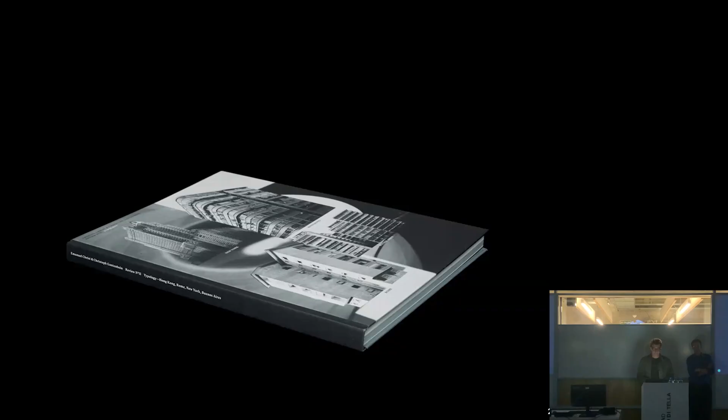So it's actually a collection of building types. We called it very boldly - and that's a wonderful thing with teaching - it is pretty simple, it is a toolbox. Maybe I should say the typology project is not just a research project, it's also a teaching project. Because what we are proposing in this first volume is that it's not just about documenting, it's about using these types. Therefore, we speak of typology transfer.

A type can be transferred and transformed. In this understanding, in very short, typology - maybe even different from Aldo Rossi - is not so much about the frozen truths of architecture that is permanently true forever, but typology is a dynamic, creative mechanism of constant transfer and transformation. I think that's very, very important. That's also why we believe it is worth studying and documenting the building types of a city.

So it is a catalog, as I said. That's a spread of the book. In this case, New York - drawings, photographs. We never up to now did build physical models. There is axonometrics, but the models are a different dimension, obviously, as we could see. Oh, but what's that? That's the wrong one. That's the right one. Voila.

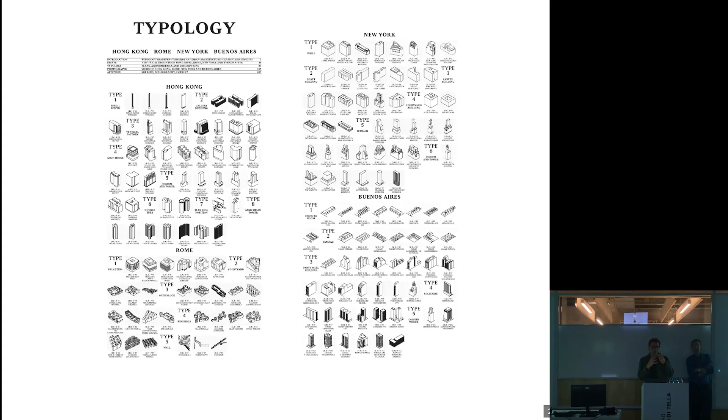It's an index. There could be a whole story about how to classify and create families, which is maybe less important right now. And because you know it, we mentioned it - I think we can show you there is a basic understanding of the wonderful city of Buenos Aires, even though we are not here to teach you about that. But there is the beginning of a project that can endlessly be continued.

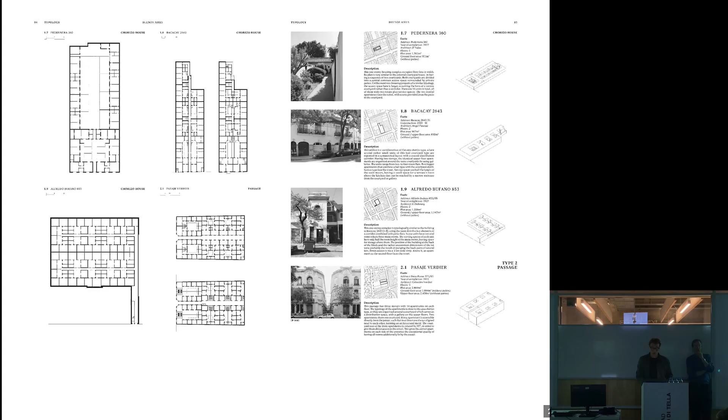The Casa Chorizo is the first family that is represented here. In different variations, it goes on, it gets more complex. The pasaje - or I don't know how to pronounce it correctly - is then the next type. When the street is entering the block, the system gets more complex.

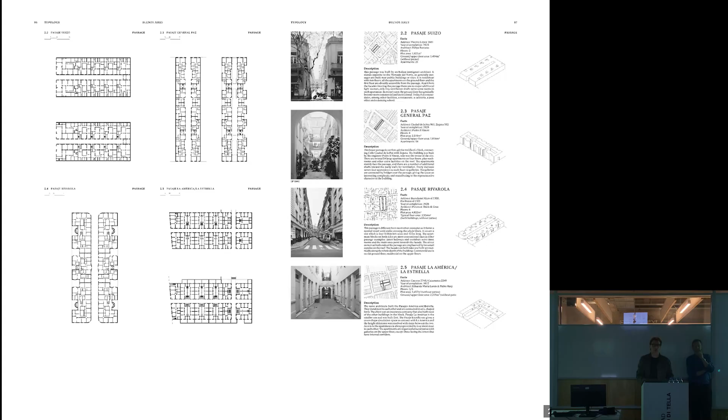You see the density. Without understanding and without having the time to go into detail, we see the complexity and the richness of the plan. But then also we understand with increasing pressure, the city is getting vertical, but the lots are the same. So I'm not speaking about authorship yet, I'm just speaking about the stupid rules of the city, the constraints, and what is interesting is it is producing perhaps the most exciting architecture, even without big city planning.

Of course, the intelligence of the architects comes into play, and there is even one very famous example by Clorindo Testa. We found that at the time, and we were charmed by it, but we are also even more impressed maybe by more generic buildings.

It's also beautiful to see that the city - the ordinary and the monument - the cultural center, the theater, is it a monument? In a way, yes, but in this case it's squeezed into the logic of the grid, of the manzana, which we've also learned yesterday with the wonderful drawings in the exhibition, how important it is. So you see there are layers of knowledge, and we come back to Buenos Aires and we learn more. We see original drawings, so the research and investigation is never finished.

And that's the last page. It's longer, but there's the last page. Also, I guess, one of the last buildings by Alvarez, the American Express Bank, to the bottom right, which we loved at the time so much and we still do today. That was the first project.

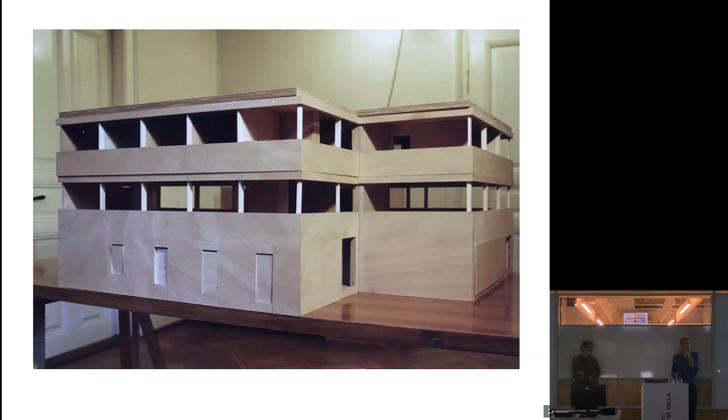So we started with the question, what is the system of reference for this project? And we did exactly what we did this week with the students here. We did a field trip to do a kind of portrait of architecture along the railway, to find out what is the architectonical theme, the subject, when building along the railway.

Already a bit over, 1970s, but they have the beauty of this very modest but very applied modernism. It's not a kind of designed architecture which is designed to represent. It's this kind of architecture which you would hardly even perceive.

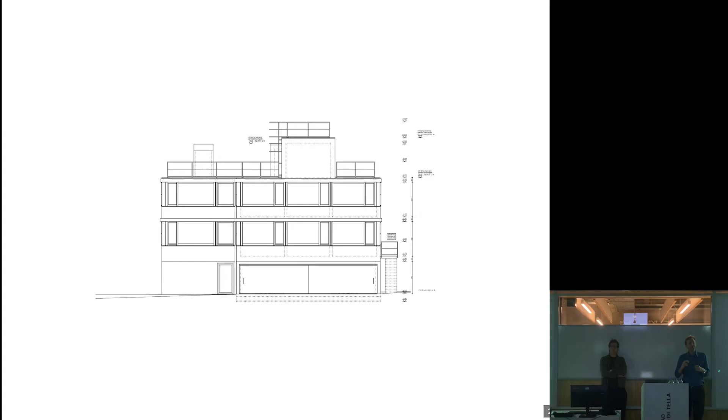This is another facade. So also this railing on the roof, the garage window, the garage opening in the front. It's all directly taken from this catalog that we built up. And even in the floor plan, you can see even the typology is based on a constructional system using a very clear regular grid. It's not a typical floor plan for housing, but it's prefabricated concrete columns. And then somehow the rooms, they deal with this industrial structure of the plan.

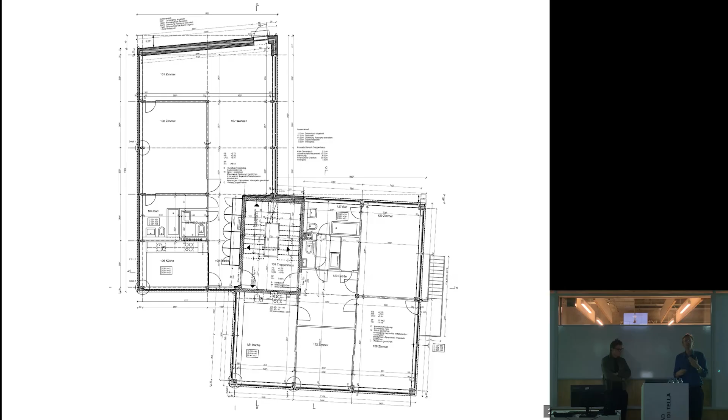And of course, it is not just a story, but the conviction is that by choosing this architecture, which is traditionally built along railways, for instance, you build up a relation to this railway, also physically, that these windows face the railway, and they accept it as a reality, and this building wants to stand at the railway, that you would also transform such a specific quality, like this position at the railway, from a potential problem into a quality, because it's somehow beautiful.

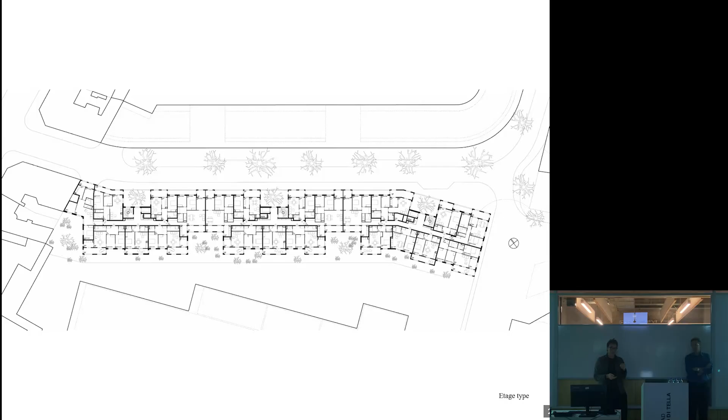So it's the logic of the meandering plan that made it possible to come to a layout which is quite generous for social housing, because the square meters, the distances—you might know this is similar in every country, there are very strict rules, it's on the square centimeters actually.

What we try to show here in this part of the plan—this is like half. You see that one apartment offers a sequence of different spaces. It's a layering, and by that, sometimes tiny rooms—a small room after a small room. But by doing that, we are offering depth, perspective, and we believe also spatial generosity, particularly because there are big openings in some parts.

This is the kitchen—we have to do it twice. We introduced the rule that the kitchen is connected with a double door to the room in front. And then there's a third element: the entrance, the room, the kitchen, and then the loggia.

The loggia doesn't count because it's a free, empty space—it's like a balcony. We learned this can often translate into a garden in the context of Buenos Aires; we saw the wonderful project in O'Higgins this morning. But here, especially because we're talking about small apartments, we transform the balcony that isn't counted in the overall calculation into a room-like unheated buffer zone, a loggia space.

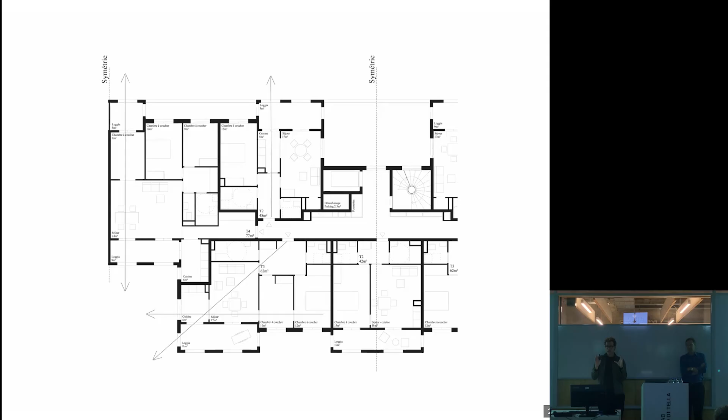You can recognize the arrows—it's about the view, the series of space, the meandering plan offering different depths. So we can even create moments with transversal orientation. This is not rocket science. It's in the end a very modest ambition: to offer rooms with a decent proportion, a window, a relationship to an adjacent room, and maybe even the perspective through the whole building. This is what we try to arrange in this very dense plan.

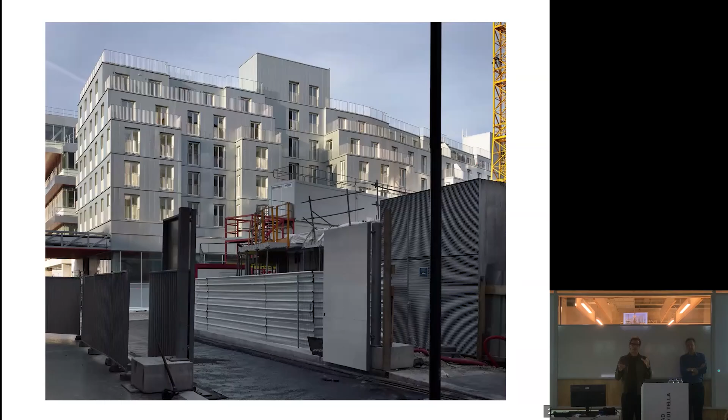It's a very light construction, the walls are 5 centimeters thick. And that's the outside, that's the freestanding end. We can read a stepping back volume, one type of window. When we get closer, you see that was the construction of the neighbor. It is a bit more complicated because there is a workshop underneath.

It's raw, or almost very little treated steel panels, one type of window. So the building speaks a language which is familiar to the place, if you will, but at the same time it is also making a difference. This is Christoph Gantenbein. It has a clear principle, it's a typological order, it speaks to the context, but it tries to emancipate from it with a crossover strategy. It's grey, it has vertical proportions, it looks for the alignment with the neighbor, but it's breaking its physical attitude by using metal, that is speaking maybe of the presence of the industry, of the car or the train fabrications, etc.

So the term of type and typology was mentioned several times. Type meaning an abstract group of features which define a group of objects. Of course, tonight we speak about architecture, which are related to function, to use, but also to construction, how it is built. And of course, these types are kind of a solution for a typical problem. Like, for instance, here in Buenos Aires, you have these very deep plots, very narrow, very deep plots, high pressure of economical pressure.

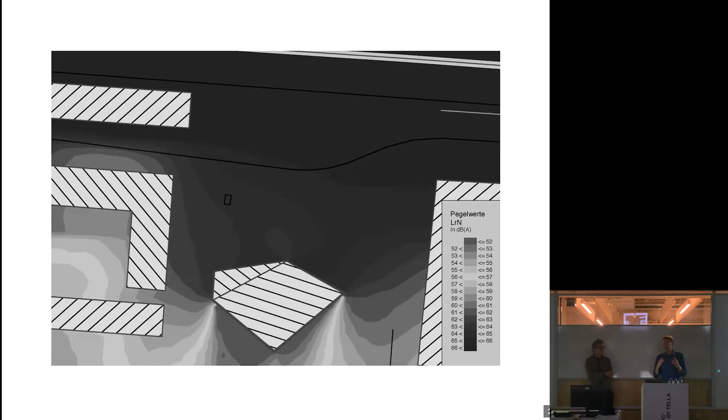It looks a bit dark here, but this is green, so this is unproblematic, whereas this is really hardcore, exposed to the noise. So this geometry of this tower is a pure technical, scientific reaction to the noise problem. So architectonical form is directly related to noise, to the physicality of noise, but also to the regulation. So building laws, and in Switzerland these kind of acoustic regulations are super tough, can have also an impact, and there were no precedents because these laws are relatively new.

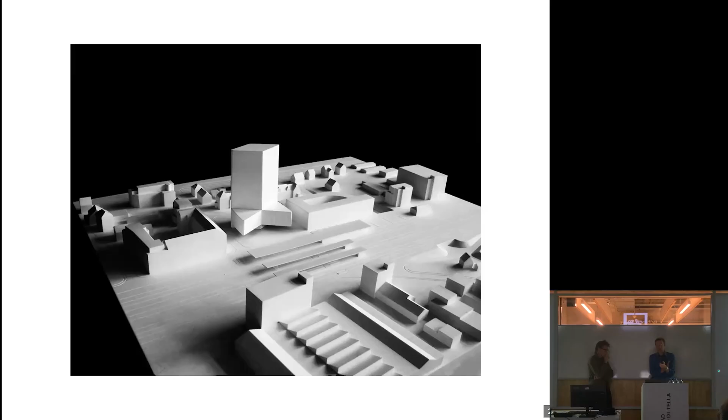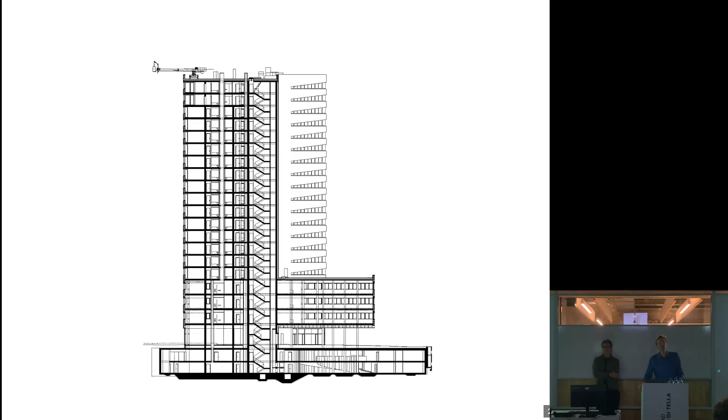So we were forced to develop this volume, which is not a type yet. You can see this section: ground floor, this socle for this podium for offices, and then this tower for the housing. The specific solution, the typological invention, is this fan floor plan with a

staircase in the corner, which you would normally not do. Normally you put the staircase in the center because you don't need any light there. High rise, you wouldn't use the staircase anyway. But you would put it where you have the noise, and let all the apartments profit from the sunny

south side and from the side which is not facing the noise. So it is a kind of precarious type, because these apartments are very deep. You can see the ones along the facade, they have at least light, but not openable windows, but in the center they are 12, 13 meters deep with light from only one side.

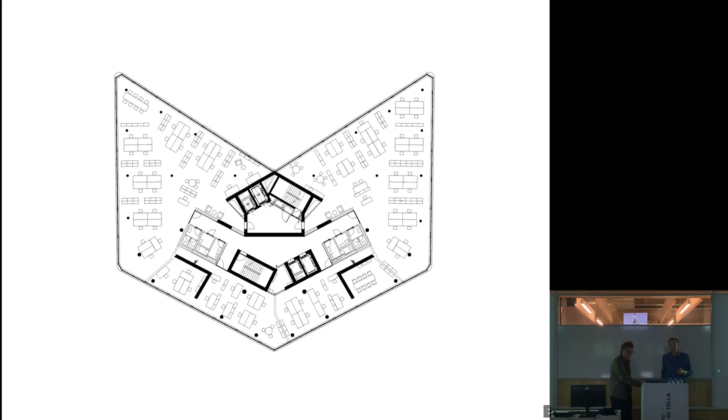This is the socle with these offices. This is much less problematic, of course. And then it's a question as an architect what you do with this very rational construction of such a type, or a development of such a type.

And we were appreciating, and also very excited, in giving and finding a form for this specific organization of the floor plan. So this staircase is completely closed, and then these windows, which are opening slightly like an eye, which is opening. Somehow they tell about this noise, which is not optically visible, but architecture is very much about optical perception.

So the form of these windows and the form of this architecture tells about this protective character of the body and of the facade, which has to do with this noise. The socle, of course, with these offices doesn't need it, so it works in a different way.

And therefore, through this form of this closed staircase, the relationship to the railway, again, as in the example before, is built up, because it is a direct transformation of physical, acoustical reality into architectonical form.

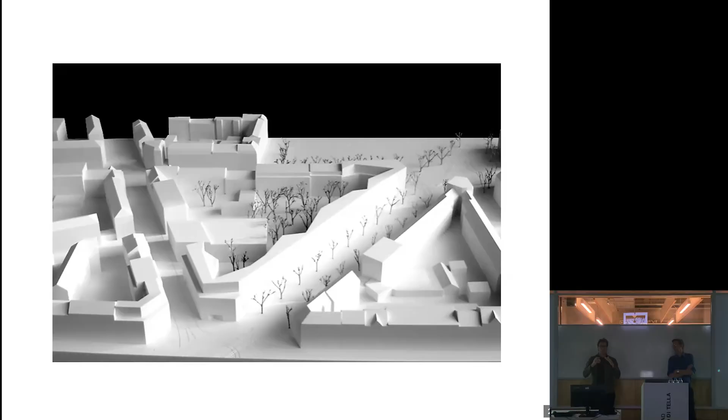So we started to widen up the angle a bit, and to move the line. It was almost like the geometrical problem in the plan was affecting the formation of our block. There's another thing: the courtyard is on the north, so all the apartments have a noisy street in the south, and a very beautiful, quiet garden on the north. By bending and tilting the facade, by zigzagging it, we intended to introduce an orientation leaning to the west or to the east. So in the end, it's not that irrational at all.

But what's interesting, by having introduced the movement into the plan, similar to Paris, I was speaking about the meander. This is maybe a less mathematically organized form of a meander. The depth of the plan varies strongly. I think the maximum depth is like 18 meters without the balcony, and in the most narrow part we are around 6 meters. It's also stepping back a little bit, similar to the Paris project.

So what we are doing is creating a dramatic problem to our own plan. And that's what you do when you do a project: you use all your creativity to produce a serious problem, and then you take the rest of your creativity and intelligence and try to solve it.

And the type of the apartment - in that sense it's a very typological project again. It's one type. It's not even a variation of types maybe, but a variation within a type. It's stressing the limits and testing the limits of a type.

The type is simple. Maybe I like this one as an example, because you see from the staircase - or maybe you don't see, but you follow - we enter one big space that is transversal to the street, with a loggia or a veranda and a balcony to the garden. Then adjacent to this main central room, which is also a distribution space, you have a certain number of rooms. The kitchen stands in the middle of the space.

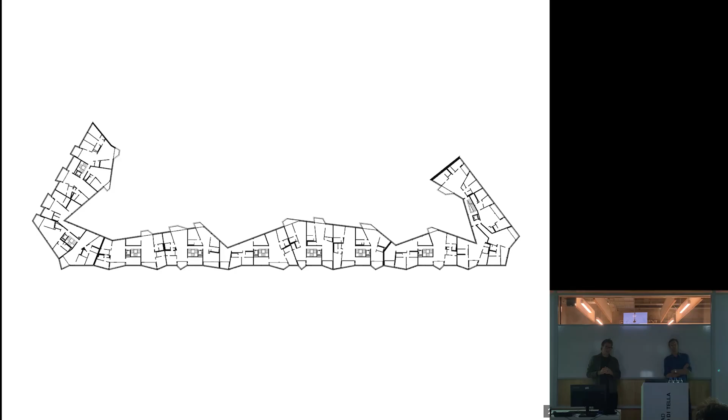And now, just as a reaction to the geometry, we find 45 different floor plates in the end, including some variations in the section. But we could argue it's actually always the same type, with beautiful exceptions. The first one I'm showing you is the corner, where one apartment bends around the corner - this is at one tip of the figure. And in the upper floors there are the duplex apartments, where it's getting even more narrow.

When we spoke about the project at the time - and that's maybe another connection to our portrait of Buenos Aires - we were quite romantic and said: look, how can we possibly produce a building that offers moments like in an old town, structures that we love so much, a weird building in the backyard in the 19th century, because that's the memory - that's the memory we have as designers, and we remember these spaces. We tried to trick ourselves and produce a system that is actually offering these types.

A few more views: the garden, and then the straight line on the boulevard.

That's another project which deals with the relation of the city and the building, which is a bridge. Of course, we developed it with engineers, but we somehow had a lead. This is the model of this bridge, and it is situated.

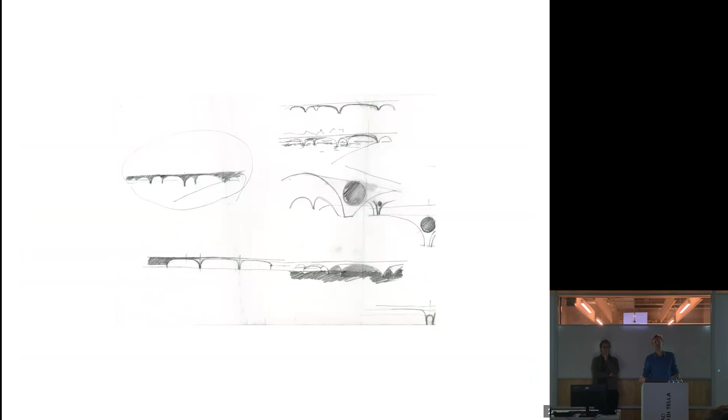And when developing it, we were starting with this very archaic image of a bridge. Now, how would a child draw a bridge? It's the arches, and of course this image, this idea of a bridge has to do with the structural system, the load-bearing system of a stone bridge, which for us was a very adequate image in relation to this historical city.

But then, of course, which came very well together, these arches, together with the fact that there were these existing fundaments. So these were drawings of these three arches overspanning the water and smaller arches spanning over on the riverbank, where you would have paths, ways along the river where people are jogging and walking their dogs and bicycling.

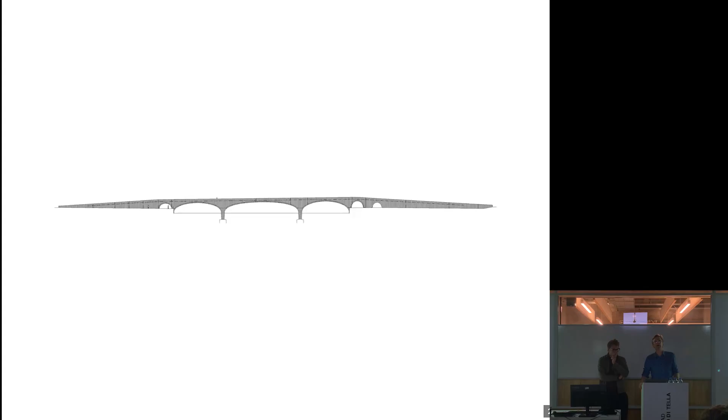But then the question, of course, would arise: how would you transform such an image, such an idea of a bridge, into a modern system? And of course, it's not a stone bridge anymore, but it is concrete. And when talking about types, and you could call the arch bridge a type, it is a solution for a typical problem. But then types can change when the conditions change, and the construction here is a crucial condition.

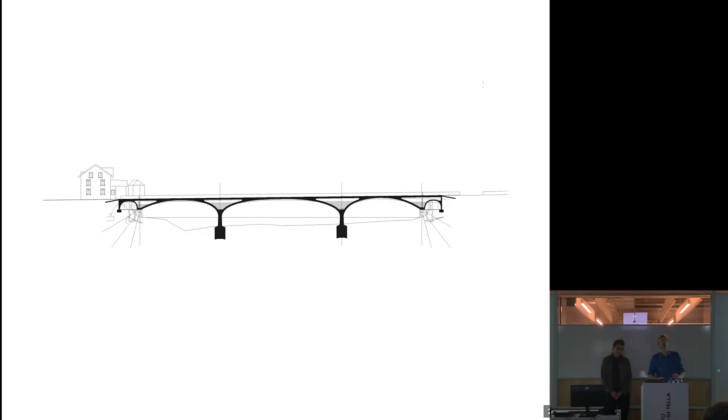So the concrete brings this massivity of the arch under pressure. Concrete works in a different way and has different potential. So we developed this load-bearing system with the engineer, which you can see in this distorted geometry, which translated this stone bridge into concrete.

And you can see, of course, you wouldn't build a stone bridge like that. A stone bridge would be much more massive. You couldn't span so wide, so flat. So alone the geometry is already a kind of direct expression of this system.

But you can also see, when you go closer, that concrete allows you to go much slimmer. So these holes in these pillars are not just showing the potential, but also they are a means to make it more economical, to save material for economical but also for ecological reasons, to reduce the concrete, which is, as we all know, in terms of the CO2 footprint, a problematic material, but for such a street bridge, the material which is suitable.

So the potential of the concrete to make it more elegant and more slim was fully experienced here, and you can see then the potential of these holes that add new possible views. Mainly also here, when you know that along these rivers, as it is a very central site in the city, lots of people are walking.

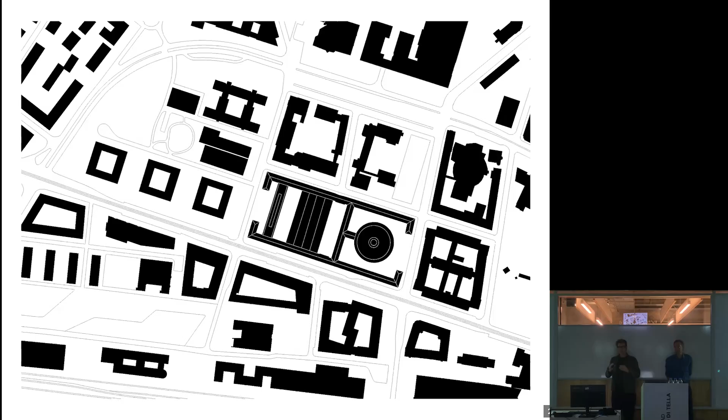Here you see the plan with the addition on the left hand of this housing building. It's an invention, but it's also an analogy. Our design is somewhere in between - it's quite a rough transformation of the existing. In plan, you see it is a densification. What used to be a big open space here is now 2 spaces with this bar. So it's radically different than before, but also it somehow belongs to the system which we found already established on the site.

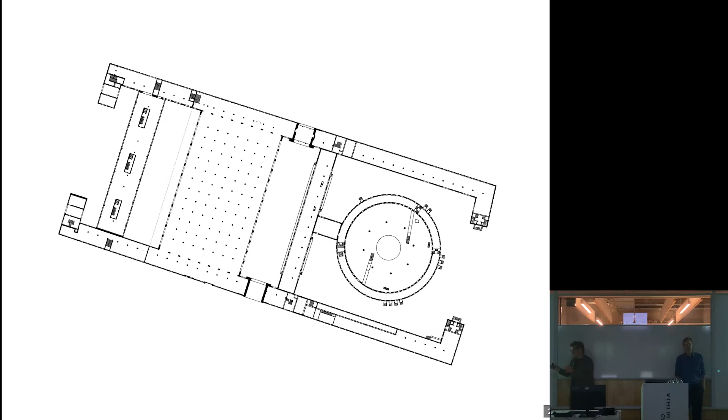And this is interesting, having spoken about the problems you're creating. The floor plate is also changing, and this shows a potential for also variations then in the organization of the apartments. It's all about apartments.

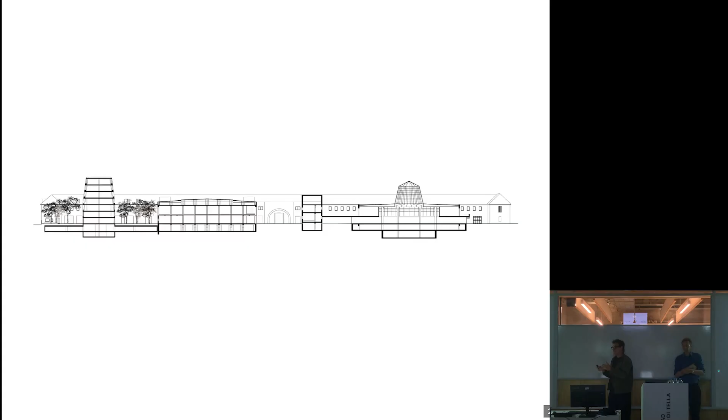And look at this, it's simple. There is one thing, that's where the kink is. For the rest, it's one grid, it's repetitive, it's like shelves, like bookshelves. Sometimes urban architecture has to be boring. It's also about anonymity. We like the idea that you can then put different types of apartments and loggias and other spaces into the regularity of a quiet, beautiful grid.

Sorry, this is again the section of which I spoke, I think with the 7 floors, and that's how it looks. The side is closed, it's clad in ceramics, it stands out, it's not following the roof and the tiles of the roof. It's a light gray, it's almost white. Sebastian and Marcelo, we are not there yet to really build a white building, but we're getting close, and you will also see we fall back into gray and many other things.

This is a very simple architecture. We also have to say we learned that the beauty and the stupidity of the grid is also quite robust. The inside, we have to confess, the plans - a developer then sold all the apartments, followed the rules of the market that we could not fully control. That's a new experience for us as Swiss architects, being used to the fact that we control every single detail. This is a slightly different reality. Real estate development, what is important? It's the urban figure, it's the main guidelines for a project, and by that we try to guarantee the quality of the place.

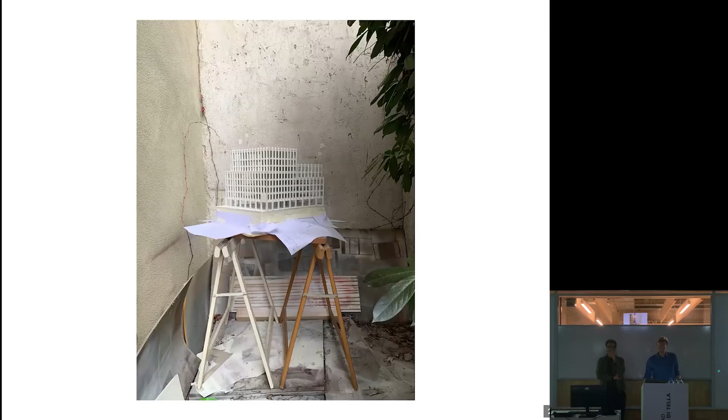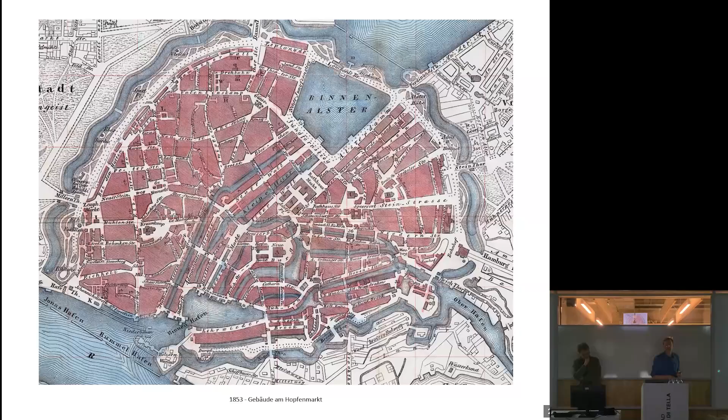So this was the historic city, which was cultivated, and it still looked like this in the 20th century. You can see this very proud 1930s building around this church. So the historical medieval city, it transformed through the ages, through the times. It was modernized in the 19th century, in the 20th century, but then of course there was the disaster of World War II, which, as with many German cities, completely destroyed the city.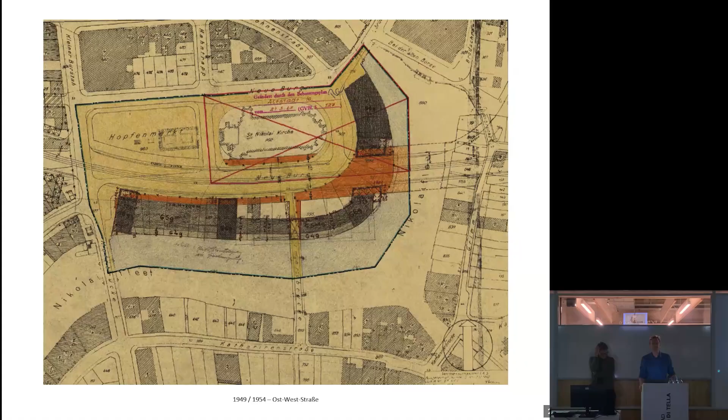The city planners also took it as a chance. It sounds cynical, but to transform the ruins of a historical city into a modern city, using this empty land for a highway-like Ost-West-Straße, East-West Street, which was crossing this center and is somehow still there. You can see it in this plan, this axis which is connecting the city. So this is somehow the brutal reality of this place.

When we were dealing with this project, also a competition, we felt this ambiguous situation. Of course you are nostalgic, if you see these historic plans and images, about the former beauty of this place, and the loss of that balance of the built structure of the buildings which form the public space, the squares, the places, and the streets, and the mass is completely changed through this modernist understanding.

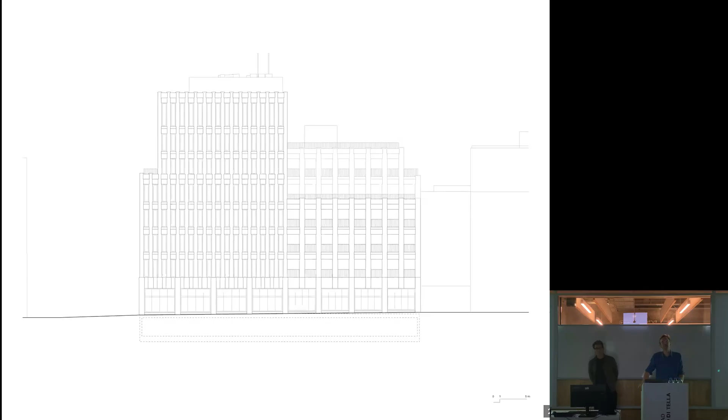This is the facade facing the water. So the dense one is the office building, and the other one, which is more generous, more open, is the housing with these balconies facing the water. And as we said, the only thing we have is the facade - inside, anyway, they will do what they want.

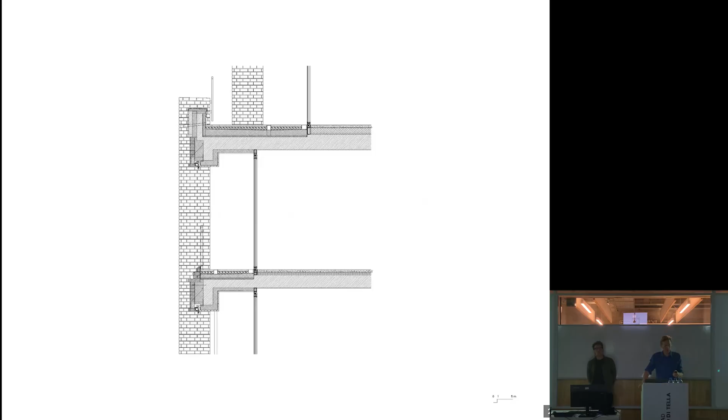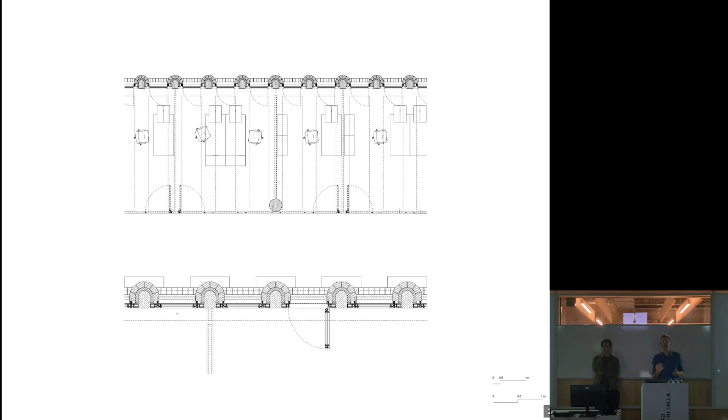So we invested a lot of architectonical interest and energy into this facade, and we made it much stronger than it actually needs to be by introducing these columns. So it's not a kind of volume which is perforated by openings, one could say, but it's a very dense row of columns which leaves spaces which are the openings, which are the windows. So this is the facade.

These columns, of course, have to do with the rhythm for office spaces. And the beauty of these plastic columns is that, if you see it like that, the windows, the openings disappear, and what remains is just the beauty of the material. And this is one of the lots of beautiful aspects of our profession, that we deal with materials.

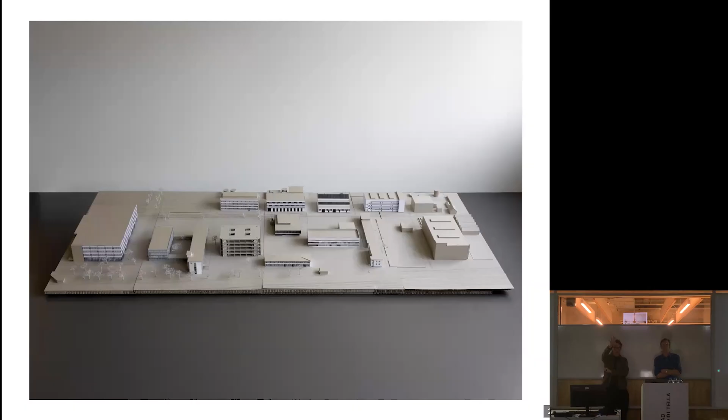So actually this next project is a small campus. The model is not as beautiful as the models that we're having downstairs. It's a campus, it's in Germany, but very close to Basel. Roche Pharmaceutical is a big company, grew over 100 years, blah, blah. 1950s, this was an important factory ground, and then the buildings that we see on this part of the model is the office buildings.

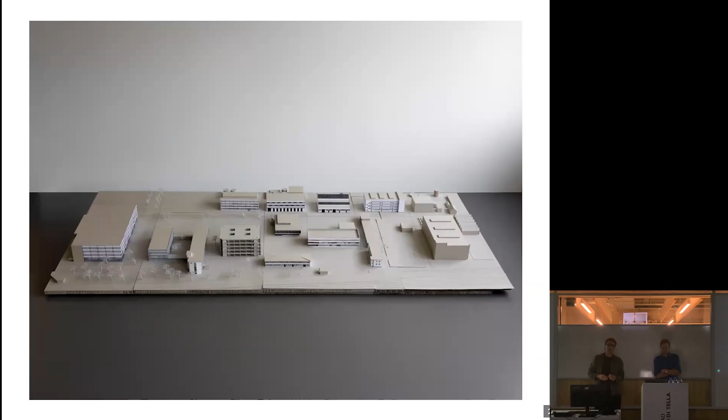And this is transforming now into a campus of research and administration, so it's becoming sort of a modernized part of the campus, modernized in the sense that it is the modernization of a typical modern part of the city. A different context, you understand - it's not Hamburg, it has a completely different layout. This is the grid, it's the open grid and the open field of a modern development.

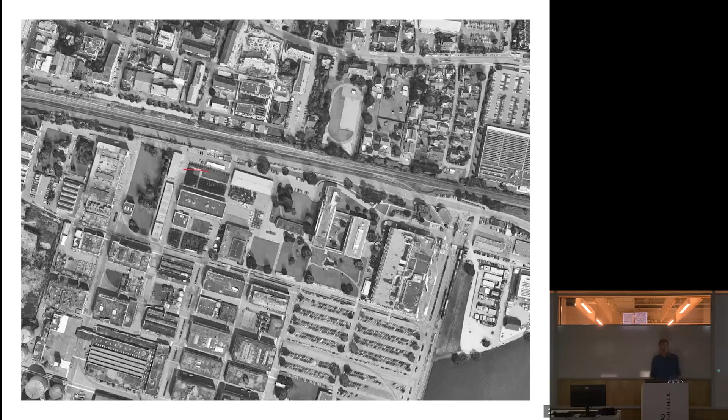And you can probably see, this is the historic main building, and then it's about the free positioning of new building blocks. This is the context. I'm tempted to say not happy bricks, but happy modernism. It's light, it's elegant, it's a bit corporate. And maybe this is a bit disturbing for you guys, but we find this as beautiful and as intriguing as the waterfront of Hamburg.

And our attitude towards the city and its architecture is everywhere the same. We try to produce, to design, to build buildings which are reflecting what's around them and which are enhancing and contributing something to this place. So they are proposing slight change, sometimes stronger, sometimes more subtle.

And this is the first project. Actually, this is a bit of a, I'm cheating, this is one out of two buildings on that side, but we count it as one project in the presentation. It's a small building, 3 stories. It's an office building, classical modern type.

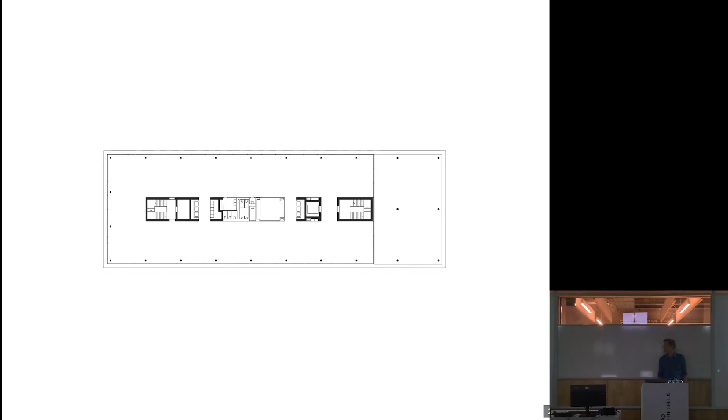And so he said, no, let's try. And that's important also. Why? Because this factory is transforming step by step into a campus, as I tried to say. So we made the case that just this open section of the office building is maybe what makes the space around it something different. It becomes a public place. The building is addressing the outside.

And actually it's also, in the meantime, used for more informal working or also just maybe recreation or phone calls or whatever. Maybe less smoking, because this is strictly forbidden in this campus, but it is about the other activity within the corporate framework of an office and campus.

And that's the view from the inside of the floor to the outside. You see the black and the white. This is the type and the structure, the hardcore element of the building. And you see the carpet. Whether you believe it or not, we designed the carpet as well. The carpet, and this is typological again, because the carpet says, I do not belong to the building.

You can take me out. The layout of the floor is free. It's a hollow double floor. So it's like a free pattern. So the hierarchical understanding of which we spoke, the grid in Munich, or also the facade in Hamburg, which is to a certain extent not independent, but in the foreground to what's happening behind, it's a different reading of a similar logic here. And you can see some glass walls. It is our reflection on modern architecture in this specific condition.

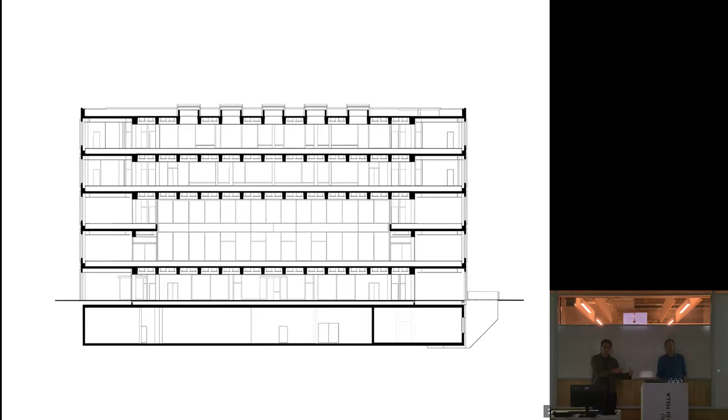It's 5 times the same floor height, but there is a double height space in its belly in the center of the building. And this is maybe giving a hint at the structure. It's about empty space in the center. I'm tempted to say what was the loggia in office building number 1 is now the empty space in office building number 2. We took the plaza inside the building, and this is the structure.

That's the plan of the building. Actually, it's not even the structure. You see the 4 twin walls in the 45 degree angle in the corner. I mean, we think it's a beautiful plan. It's empty in the center. It's just 2 rings of columns. Where you see the walls are the stairs. You saw the bracing in the facade. That's giving the stability. These walls are just for fire protection of the stairs.

So you could even take them out for structural reasons. In that sense, it's not a huge building. It's 55 by 35 meters. But it starts to offer a variation to the famous open space office landscape with the 4 columns in the 4 corners. And this is actually quite interesting because it's the inversion of the type. Christoph spoke about moments when you are motivated, obliged, forced to make a typological invention. This is maybe another small typological invention because the auditorium or the temporarily used forum in the center provoked this typological reaction. And of course, it's not about being traditional in the end.

We love to say we are traditional architects, but in every project, every architect is always seeking innovation, the new thing, the different. So within this established frame of established modernism, if you will, we created this type. It's a quite democratic building because there is no hierarchy. You can move like almost in a stadium.

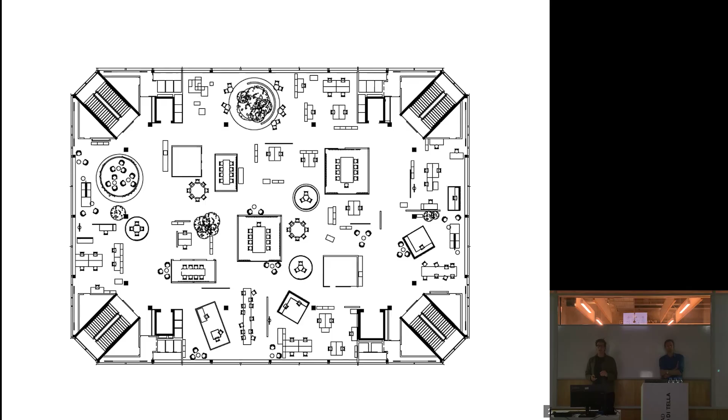We described the building at the Universidad Di Tella very much like a university or school building, because it's not just an office building. It is pretty flexible. I don't want to be too long on that. You see there are different variations.

We built a huge model. You see the spaces. There are 2 or 3 types of spaces: the main grid in the center, a ring around it with a zone of other offices and meeting places, and then this space here. This is then the possibility to even use and subdivide this big space in different ways.

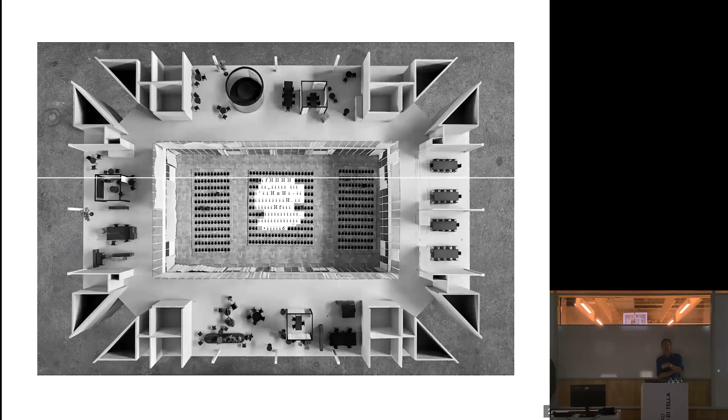So this is a campus architecture in a corporate world that is heavily transforming, actually. This came during COVID, and it was very interesting that in the beginning of the project, the idea of what an office space is was completely different from when we ended the project. This as a side note.

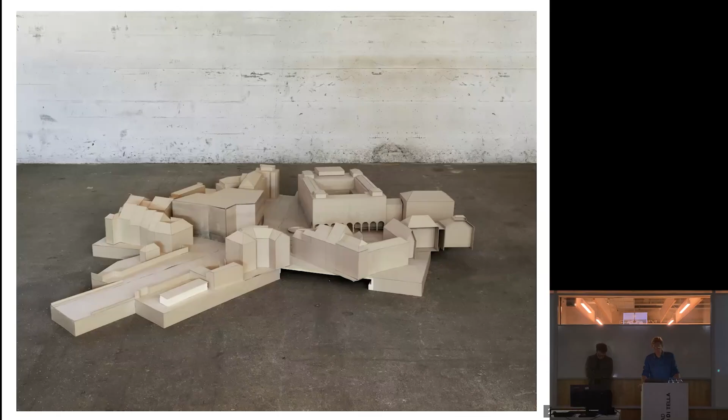In this case, the context is twofold. It's the city, a historical medieval city of Basel, but it's also the direct neighbor of this project, which is an existing 1930s museum still part of this institution. So you can see here this 1930s building, and this is our extension.

The geometry of the site is completely different. This was built as this kind of typical 19th century fortification of the historical medieval city. It had kind of like a star-shaped medieval part reaching out, but this was somehow like in Vienna, the fortifications which were then transformed into the 19th century city. So that's where the building is sitting.

So where does the project now belong? Does it belong to the city, to this historical texture? But it is also, at the same time, part of the same institution. They are connected underground, which doesn't make it easier as an architect, because they belong together. How do you express as an architect that this is an extension if there is no physical relation?

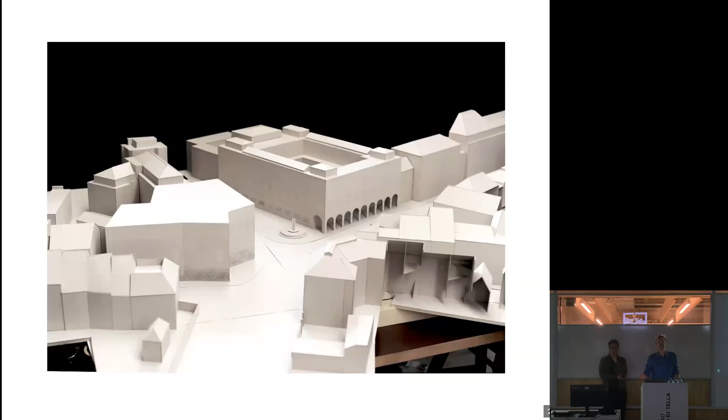In the competition, other project teams proposed a bridge that would bridge this street, which is of course a functional feature, but also an architectonic feature because it builds up this relationship. We did another one — even though they are typologically quite different, a courtyard versus a more massive compact building — they would refer to each other, the new one referring to the historic one, by using a set of typological, formal, physical tools which builds up this relationship.

This is this very beautiful 19th century, 20th century building built by a relative of Emanuel's and Paul Bonatz, the famous German architects from that time.

So it is a really beautiful house, defined by a very sober, modern classicism. It applies a modern aesthetic, very clean, but it still has features like a socle, the symmetry, the natural stone, and a kind of roof indication. We translated this into a contemporary way, so the height responds to the building.

We transformed the massivity of the stone into a more contemporary material, brick, which has been used for thousands of years but is also very industrial. We also translated typological features like the vertical windows on the first floor, and the zenithal light on the top floor, which leads to a closed facade. The game of different colors in the stone we translated into different colors of the brick.

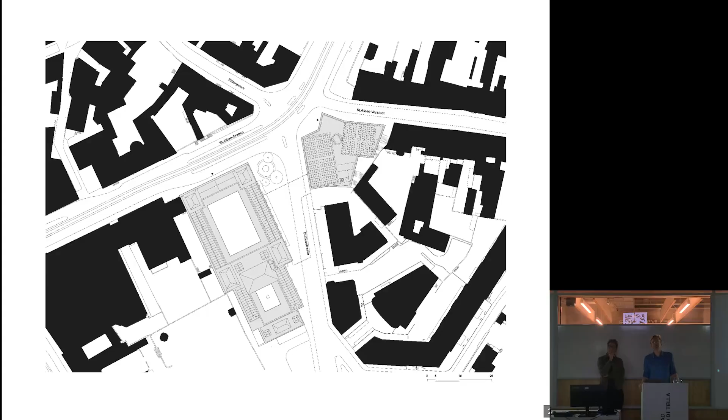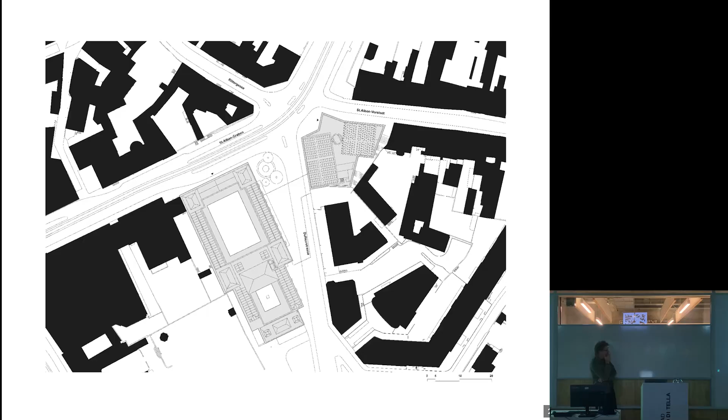But not 100%. The building looks for a certain autonomy, but mainly it follows the two streets. It follows this street and this street, and this situation is like a kind of crash, where it breaks and creates this expressive entrance situation. But this was then translated into a typological plan, so these main geometries of the streets form the inner organization of this very complex shape.

If you don't look at the inner structure, this shape is super complicated, and it was developed in an early stage during the competition, and then we were fighting and fighting to figure out how to organize this inner structure. It was somehow revealing to understand it as two buildings standing at these two streets, like an archaic floor plan — the simplest way of creating a floor plan: if you have a volume, cut it in two, in four, in six, in eight. So it's two buildings standing at the two streets, and the staircase is using the leftover.

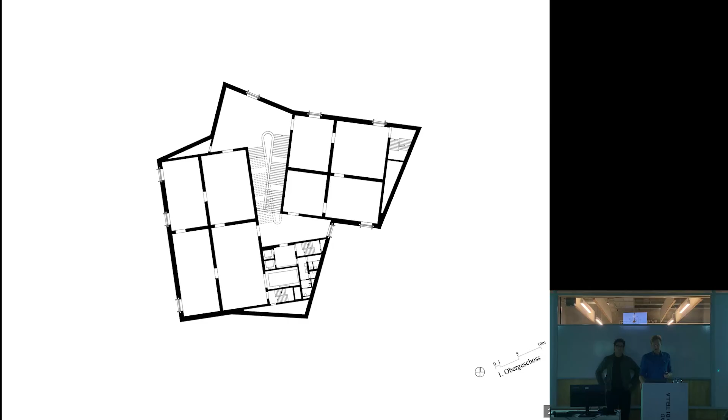For art, it's quite an advantage if you have rectangular spaces. That's what the museum required, but the staircase doesn't need it. So it's a clear hierarchization between the main exhibition spaces and the staircases, where it's not even a problem but even an advantage. We appreciated very much this geometry in the floor plan, which is not rectangular, together with the geometry of the staircases, which creates a completely weird space.

It's also like in a kind of factory. It has something very industrial, and it develops an extremely dynamic space, which has to do with the movement of people going up and down in this museum. So we created two completely different types of spaces.

This staircase — another image showing it going up from the ground floor, from the entrance hall. We also supported this geometry by introducing these linear lights. And we liked the grey color of this marble, together with this very industrial ceiling and the industrial rendering of the plaster, the metal detail of the handrail. So this is this very plastical space of the staircase.

This is fundamentally different from the exhibition space — a connection space between the existing and the new museum underground, and this is a typical exhibition space, which is rectangular, very tectonical. The wall is differentiated from the ceiling and the floor, unlike the staircase, where the complex space is held together by the similarity of the colors of the materials. Here it's very different. So the floor where you are standing as a person is completely different from the wall, which is the display for art. And then we like to develop this load-bearing system of the ceiling.

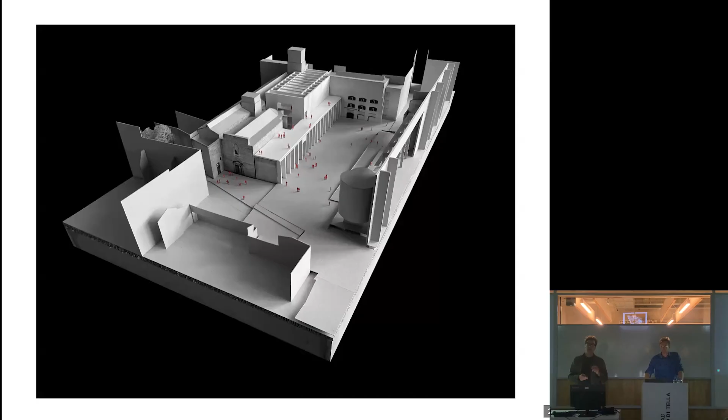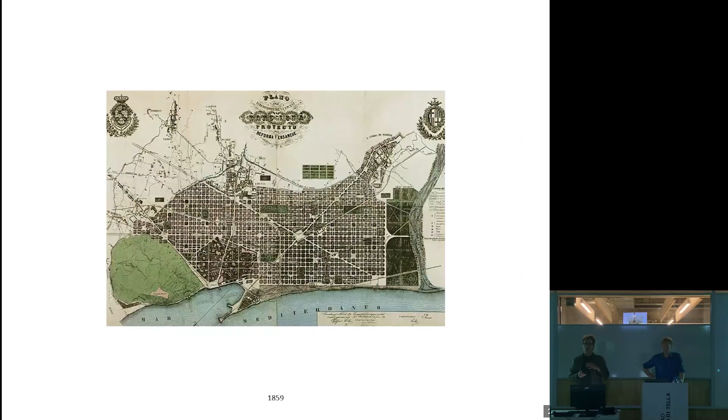There was a competition again. It's an extension to the MACBA, the Museum of Contemporary Art in Barcelona. This is the Raval, on the left hand of the Ramblas. To the left you see the part of the very dense city center, surrounded by the Eixample by Cerdà. Just to give you the context of Barcelona, we're talking Old Town, in the very city center.

A city center that, by its density and social fabric, has also been a recurring subject for many generations of architects, how to improve the conditions in this very dense city center. Many of you might know it well. It's also, by the way, now one part of Barcelona highly affected by this over-tourism problem, but that's another story.

Even though in the 1980s architects like Clotet and others started to develop plans to improve, or reconquer, as I said at the beginning of the lecture, reconquer the historic city by opening it up. There are cloisters, monasteries, old hospital structures. The idea of that generation of architects was that one should open and connect these embedded, closed spaces and make them public spaces.

And in this context, a bit against this idea of a very subtle historic network being opened up, the museum by Richard Meier came - a star architect landing his sort of big luxury yacht into this Raval. In a way it's a fascinating building, and that is the elegance of a typical modern building. But you see it is detached from everything, and it sits there. Without getting lost in details, one could say 20 or 30 years after, it did not really connect to the neighborhood, which is also not an easy thing to do.

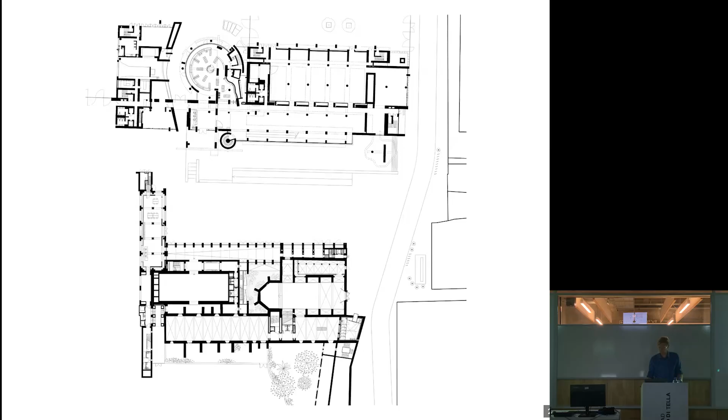So, speaking about adding layers, this is almost a symbolic diagram that speaks about adding volumes, adding layers on top of the existing. This is actually the structure: it's a box and a screen. You could also call it an arcade, or we call it the galleria.

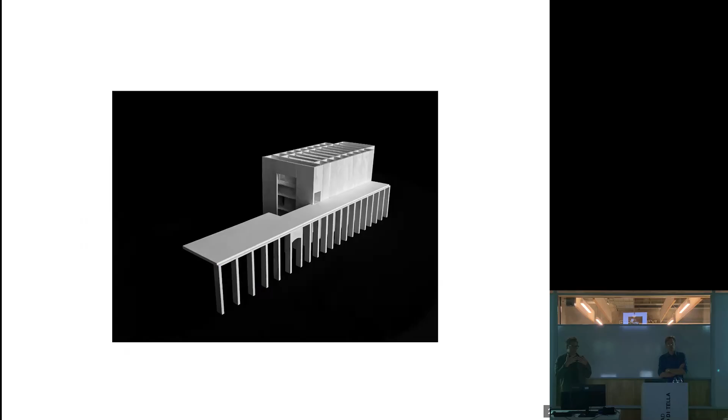It is a screen that is opening to that square. Or you could also invert it and say it is the idea that this public space is entering the museum. Something that strangely doesn't really happen here on our model, but in reality this is closed and it's also detached. It's used by skaters. Some people are intimidated and afraid of the skaters - they make noise, and that's quite violent, no?

But the idea of our project, which was different from the other competitors, was that it's about the exhibition space in the box - and we said it's maybe more about urban space. So the museum, architecture of the city, it's also about urban space. This plaza invading the museum informs the plaza.

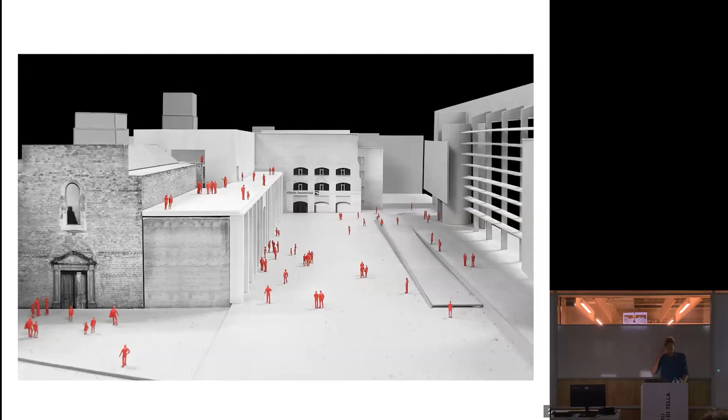And then by adding onto and building on top of, we create a little stretch, which is an urban balcony that could be quite interesting. It's on the southern side of the plaza, so the sun is not directly shining on it all the time, so it's actually quite an interesting space. You see a section, Meier building on the right, the many layers of the new on the left.

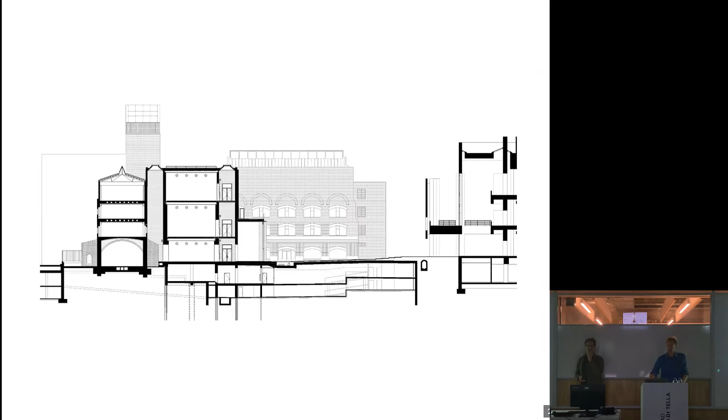As much as I speak of the old medieval city, there is a parking underground, so it's even a bit more complicated. It's actually quite a mess. You have 2 levels of parking.

For the relationship of the 2 museum elements, it's interesting because you could potentially connect them. As very often in competitions, there was the idea that we could connect it too, but now it's too expensive for the moment, which is fine with us, because it makes the public plaza even more important. But we have to build on top of that.

What is also interesting is again brick, even massive brick. You see the massive brick walls getting a bit slimmer toward the top, following the logic of tectonics and gravitation. Then the beams, metal beams - it's elementary construction in a sense. We also tried to do it low-tech in terms of building systems.

So, of course, the 3 galleries of different proportion, following the section, the logic of construction of the walls. You see the different width, also slightly varying in height. They are air-conditioned. Then you see a gap space between the old historic structure and the new wall that can be naturally ventilated and used for night cooling, so it's a buffer zone. The same is true on that side, and the same is true for the galleria.

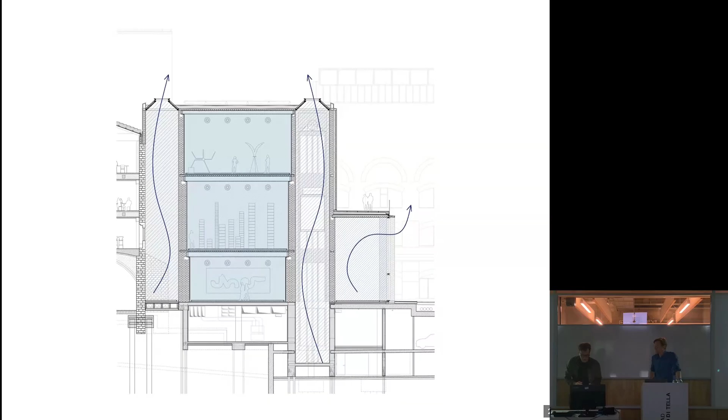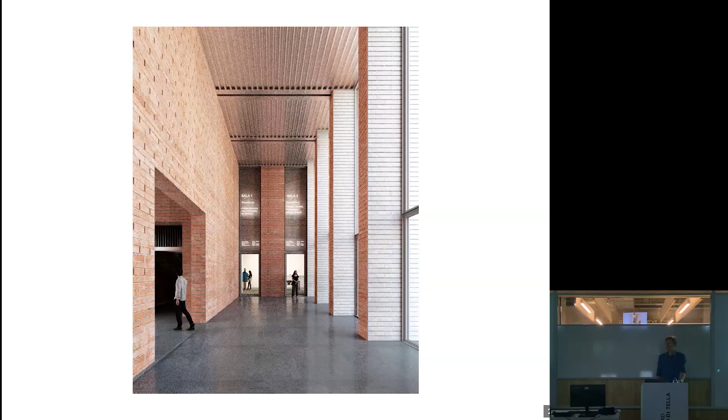This is now on the other side to the plaza. The brick - we like the idea to paint one face of the brick white. So depending on the perspective, you remember Hamburg, where the pillars are closing the wall. Is it a white wall? Is it a modern building? Is it an archaic sort of arcade?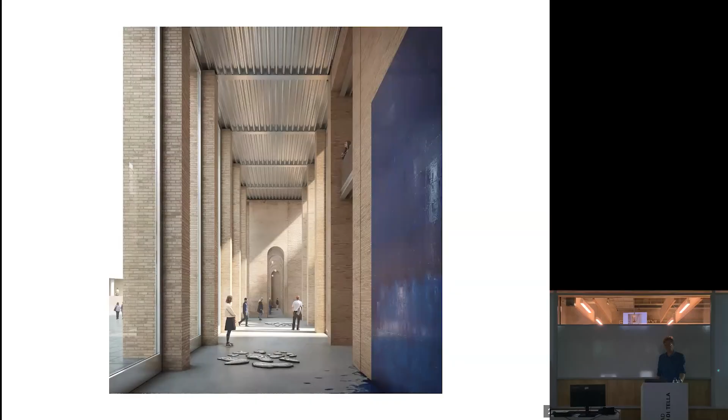That's the view in the Galleria. Square is on the left, the exhibition on the right. This is when I enter from the plaza, the Alps. So there is a romantic thing.

This is the chapel, this is the old wall. You got it, no? You follow. And then, in the meantime, we developed in an even more radical way, an open staircase. It's open to the outside climate, where we can then reach the upper floors and the terrace.

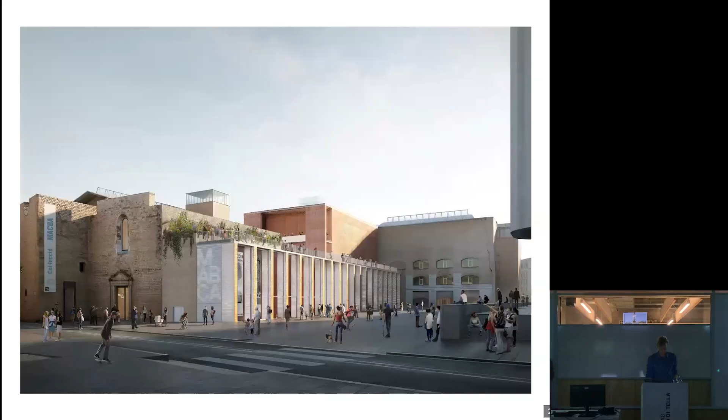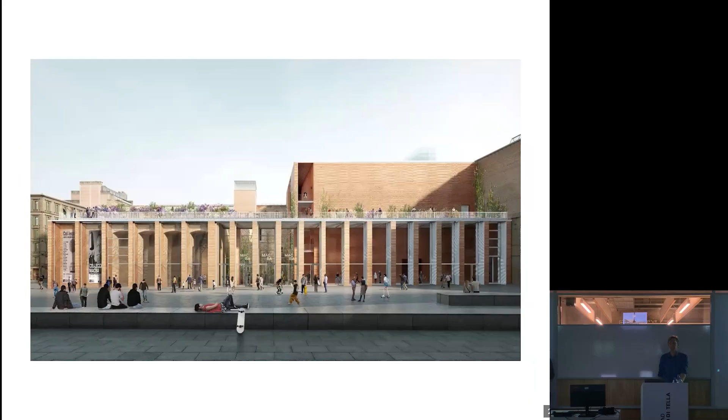Now you see the white brick and the red box, the different layers. And this is the view, the skater in the foreground and the open museum in the back. And with that, I give it back for the last time to Christoph to show you another museum, another ongoing project in an early stage, which we do together with the Antwerp-based office Bau.

In Barcelona, of course, as I said, a museum is a public building, and public equals monumental in this modern understanding of the term monument. In this case, we really integrate the scale of a public building of the museum into the historic structure of the city.

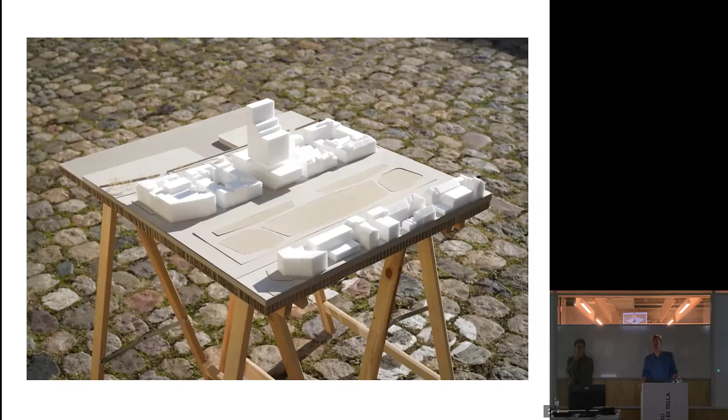And in this case, in Antwerp, it's a different way. It is a very clearly monumental building, monumental in scale, monumental in its urban role, and this has different reasons.

Of course, the brief was given somehow that it should be a high-rise. It can be a high-rise. It has to be a high-rise. Otherwise, you cannot place the square meters that are needed. But of course, these are just the requirements by a client. And you, as an architect, have to find the form and the arguments why this is the right thing to do, architectonically, urbanistically, but also functionally. We will come back to that.

We were developing, of course, this is design, developing your arguments for such a monumental vertical museum. This is the place where it is going to be built, in the backyard. You can see the Schelde, the river, which connects this important harbor to the sea.

In front, it's a kind of artificial docklands built in the 19th century, connected because of the tides and different river water levels by this lock, which connected this inner dock with the river. Here you can see it in a later photo. The piece of land between the river and the docklands was built in the traditional 19th century block city, perimeter blocks, and you can see ships using these docks.

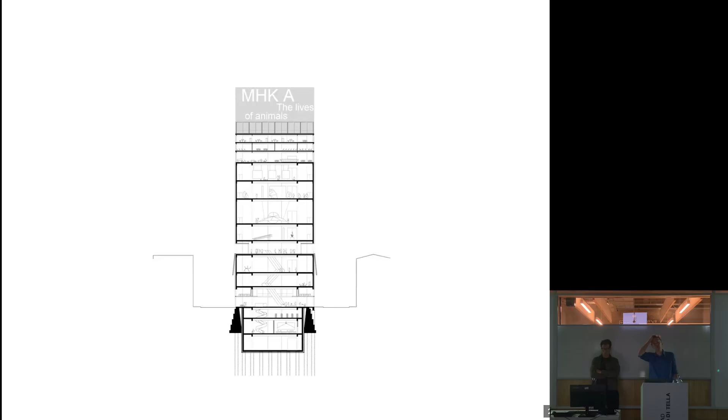And then this very high building of around 80 meters, which develops—this was quite a challenge in the competition, to develop a vertical museum. Of course we are not the first ones to build one; it exists. But a vertical museum of 80 meters is not comparable to a vertical housing tower or vertical offices.

Because with housing or offices, you have a stacking of floors—you go either to floor 37 or floor 52. But in a museum it's completely different, because as a visitor you walk from floor to floor, and you don't have a floor of 3 or 3.5 meters high, but maybe 6, 7, 8 meters high. So it has a completely different logic in its verticality.

So what we developed is a superposition of different parts. We avoided the repetition of the office tower by clearly creating identifiable pieces. The main box is the exhibition box for the collection, then a podium for the temporary exhibition—which normally has more visitors, so it's closer to the ground—creating a clear, accessible terrace between the two, which is attractive as it relates to the public space.

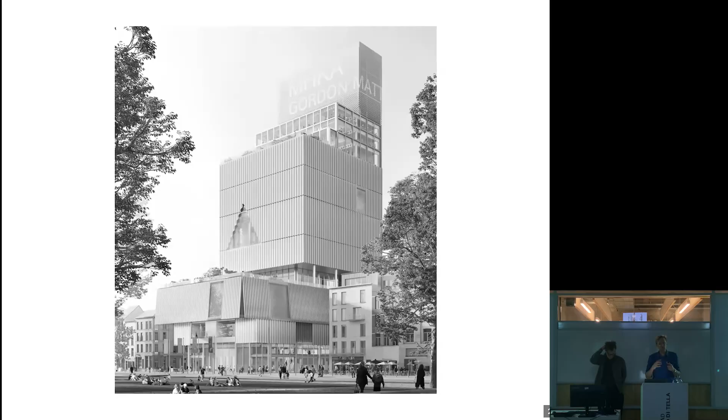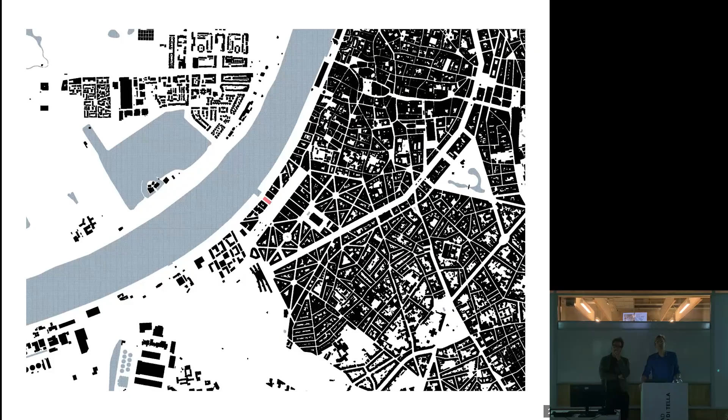This is the position on the map of the city, showing this very specific situation. The floor plan—it was important, given this attractive situation facing the river and the park, to create a typology allowing a double entrance, so the building wouldn't have a front and a back, but two entrances, though not two identical sides as seen in the photo; the sides are very different. So this is the ground floor, with how you place the cores, which is the main issue in a high-rise.

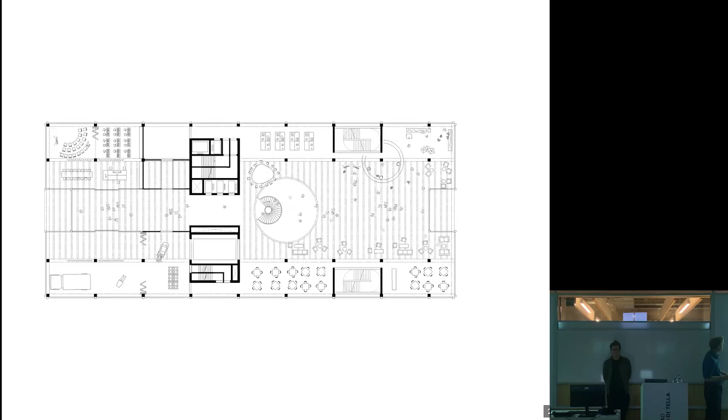Again, the program: collection, as I said.

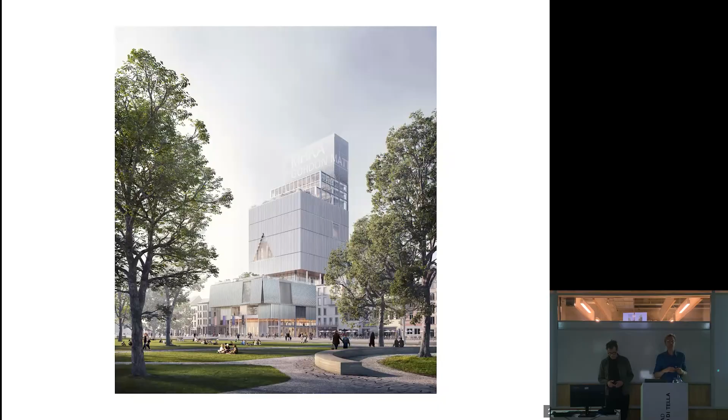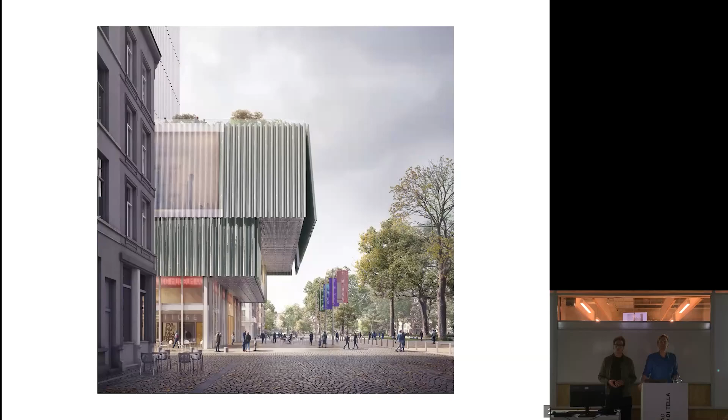And again, this visualization shows that the superimposition respects these two very different sides. So to the park, which has the scale of the city, of the urban space, you use the potential of this stepping up, of showing these different entities very strongly, of relating the floor to this park, of creating an entrance which mediates between the scale of the public space and the interior hall.

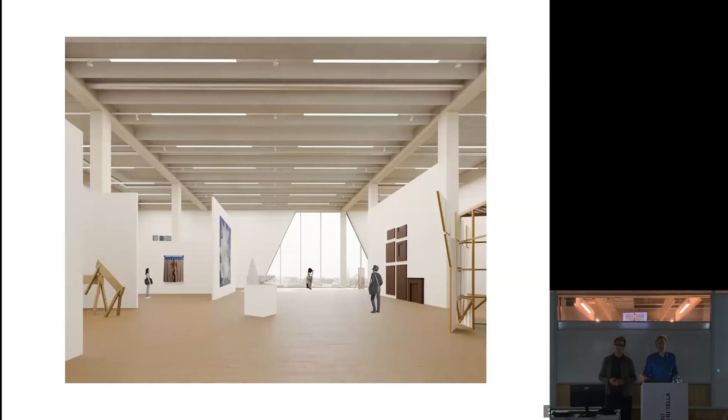Then the exhibition floor with this changing exhibition, which is very generous and very horizontal, whereas the collection in this box is much smaller. So there you can also create different conditions on different floors for bigger and smaller pieces of art.

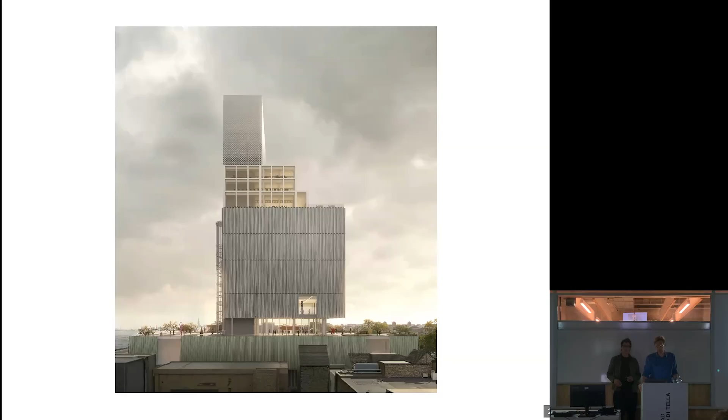And then, as I say, these two very different sides are somehow reflected in the way these volumes are put on top of each other. So a much more soft and articulated side to the city, which creates a kind of play with the scale of these elements, whereas to the water, which is really very strong, a very large river, the building reflects this landscape by a different scale, creating this very strong front.

Thank you so much, Emanuel and Christoph, for the wonderful presentation. We sense your professionalism and creativity by spending the week with you in the workshop, but it was a true pleasure to now see it and be guided through your work by the creators themselves.

I don't know how tired you are, for perhaps someone has a question or a comment. You're still hanging in there? We are fine, but we are in jet lag anyway, so we feel a bit bad, we don't really know what time it is, but we are happy to take questions or comments. Perhaps if we see something that comes up, take a chance.